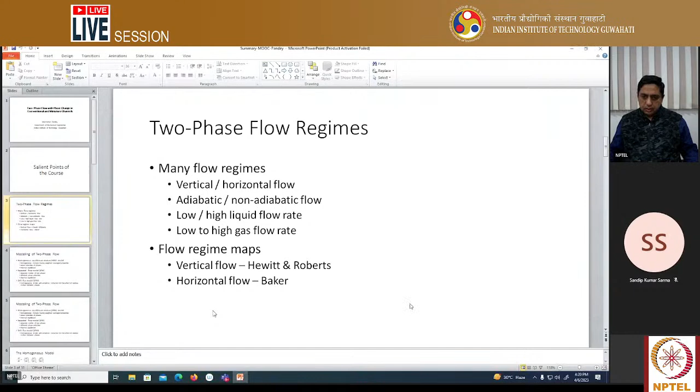Okay, I'll unshare and share again. After making full screen, I'll share it again. Oh, I have unshared, but still it is showing in YouTube. Now I cannot open this. Or should I share the whole screen? I'll share the screen itself. Okay. Still in YouTube, it is not showing. Okay, and now it is showing full screen. Okay, thank you.

Okay, so in two-phase flow, there are many flow regimes, unlike single-phase flow, in which there are only two major regimes, laminar flow and turbulent flow, and in between transition. So two-phase flow is much more complicated compared to single-phase flow. And these flow regimes depend on many factors. Whereas in single-phase flow, there is only one non-dimensional parameter, Reynolds number, which characterizes the flow regime.

In two-phase flow, there are many factors. It depends on the orientation, whether the flow is vertical or horizontal flow. There are different flow regimes, where some of them occur in vertical flow only, some in horizontal flow only, some in both.

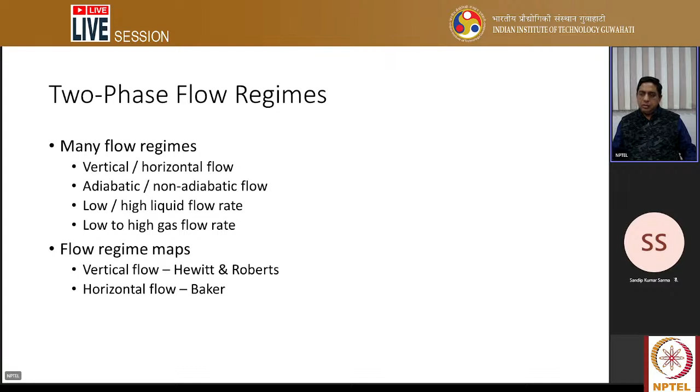There are many flow regime maps for vertical flow and horizontal flow and different types of flow arrangements and geometries. In this course, we have discussed only two flow regime maps, one for vertical flow by Hewitt and Roberts, and another for horizontal flow by Baker. In both of these flow regime maps, we calculate two parameters, and then based on their values, we locate the point on the map. And then based on the location of the point, we predict which flow regime is most likely to occur.

Then in the course, we have discussed modeling of two-phase flow. The modeling of two-phase flow can be done based on the flow regime, and there are some models which are not based on the flow regime. If we know the flow regime, then we can use a flow regime-based model. And if we don't know the flow regime, then we have to use the model which is not dependent on any particular flow regime. So in this course, we have discussed only those models which are not dependent on the flow regime. And we have discussed three models: homogeneous equilibrium mixture model or HEM model, separated flow model, and drift flux model.

In the homogeneous equilibrium mixture model, it is assumed that the two-phase mixture is a hypothetical fluid, and it has some hypothetical properties which are obtained by weighted averaging of the properties of the two phases, gas and liquid phases. It is assumed that both phases move with the same velocity. Actually, there may be a difference in the velocities. And thermal equilibrium is also assumed. That means both phases are at the same temperature. So if it is a liquid and vapor mixture of the same substance, then they have to be at the saturation temperature at the local pressure. So temperature is a function of pressure.

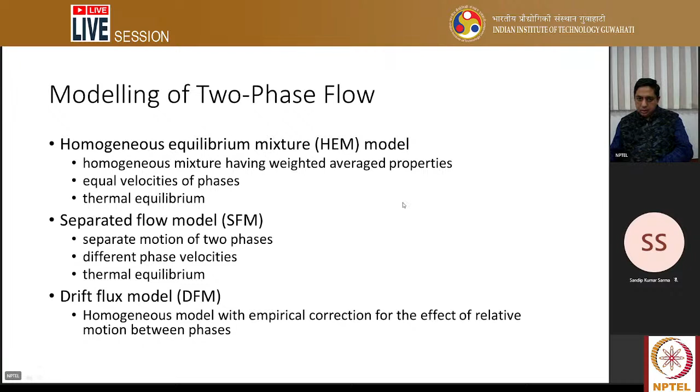Okay. In the homogeneous model, we write the balance equations for the mixture. And the momentum balance is transformed in such a way that every term is a pressure gradient, that is rate of change of pressure with the axial coordinate Z. This is a one-dimensional steady-state model that we are discussing. In this course, we have restricted to one-dimensional steady-state model only with constant cross-sectional area. So the momentum balance, after doing the necessary mathematical operations, we get it in this form.

The negative of the pressure gradient, because usually the pressure decreases as we go downstream along the channel. So that is why we write in terms of the negative of the pressure gradient. So the total negative pressure gradient is equal to the pressure gradient due to friction, pressure gradient due to acceleration, and pressure gradient due to gravity. The sum of these.

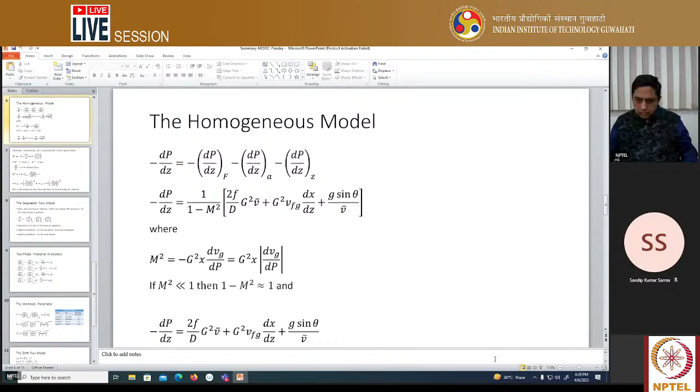I think I should use the laser pointer. Laser pointer? It is not there. Okay, anyway, I'm using the cursor. Where is the pointer? Mark? No, I don't want to mark, I just want to show. It is not there. Okay, I'll continue with this. And how to switch on the camera? Escape. Okay.

Okay, so the momentum balance is as follows. The total pressure gradient is the sum of the frictional pressure gradient, acceleration pressure gradient, and gravitational pressure gradient. And then the acceleration pressure gradient is written in terms of the mass flux and the specific volume. And then after some algebra, we get this expression: pressure gradient is equal to 1 upon 1 minus M square, and in the bracket we have 2f by D G square v bar plus G square vfg dx by dz plus g sin theta upon v bar.

So in the bracket, the first term comes from the frictional effect, the second term comes from the acceleration effect, and the third term comes from the gravitational effect. And here M square represents the compressibility of the vapor phase or the gas phase, and it is given by minus G square x dvg by dp. dvg by dp is negative, so we can write it as G square x absolute value of dvg by dp.

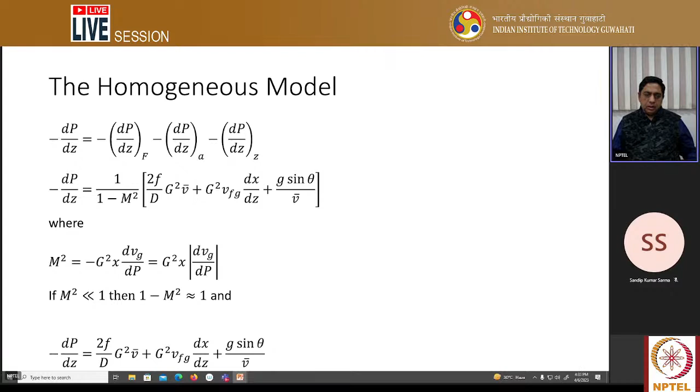Okay, this m square parameter represents the compressibility of the vapor phase, and if m square is very small, we can neglect it. And the other extreme is that when m square approaches 1, then 1 minus m square approaches 0, and then the pressure gradient approaches infinity. So that is called choked flow, and that is the limit of the flow through that channel. More than that just cannot flow through that channel. In fact, flow equal to that also is not possible through that channel. So to get that maximum limit, we set m square equal to 1, and then from that we get the expression for maximum mass flux, and expression for the maximum mass flow rate.

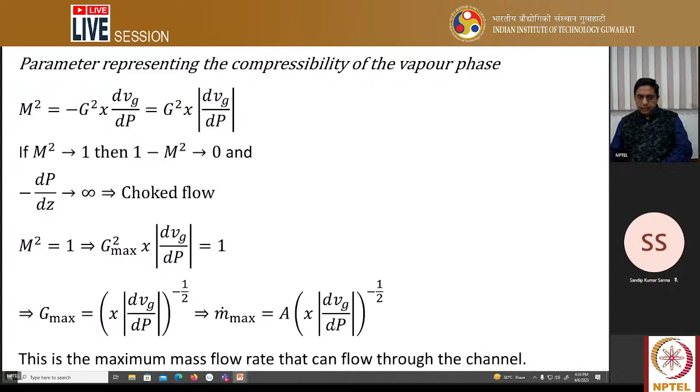Now the separated flow model, the mass and momentum balances for the two phases are written separately, and then from that we get the expression for the total pressure gradient. So again, it has the same format. The total pressure gradient is the sum of the frictional, acceleration, and gravitational pressure gradient. But these expressions are complicated and longer compared to the homogeneous model. So we get expressions for each of the pressure gradients. And since these expressions are complicated, to evaluate them, we use graphs or correlations.

And there is a quantity called two-phase frictional multiplier. In fact, 4 such multipliers are defined, which we will see in the next slide. And there are graphs and correlations for the void fraction. So there are different correlations given by different researchers, empirical correlations. Some researchers have given in the form of graphs, and some have given in the form of correlations, that is algebraic expressions.

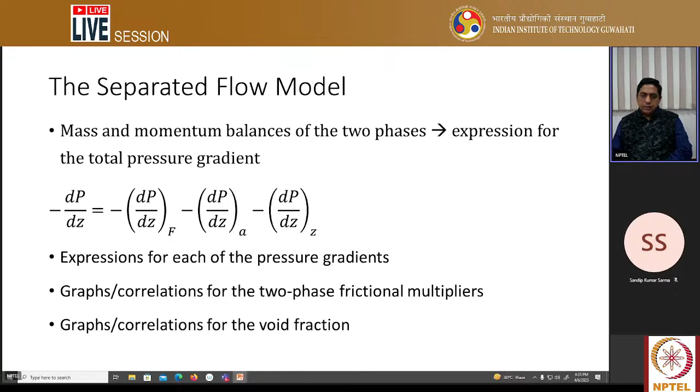4 frictional multipliers are defined. So this dp by dz subscript capital F is the frictional pressure gradient. And on the right hand side, we have subscript capital F, comma fo. This is the hypothetical pressure gradient that would have occurred if the entire fluid were in liquid phase. And then here in the second line, we have capital F, comma small f suffix. So this pressure gradient is the hypothetical pressure gradient that would have occurred if only liquid were flowing through the channel.

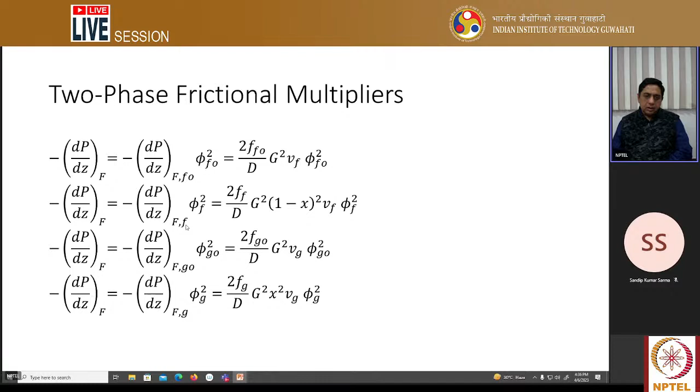Okay. So the corresponding two-phase multipliers are denoted by phi fo square and phi f square. And then in terms of the mass flux and quality and the friction factor, we have this expression 2 f_fo by d g square vf into phi fo square. And here we have 2 f_f by d g square (1 minus x) whole square vf into phi f square. Now similarly for the gas, two hypothetical pressure gradients are defined, subscript F, go and subscript F, g. This is similar to those for the liquid. Two frictional multipliers are defined, phi go square and phi g square. And in terms of the mass flux, quality and friction factor, we have these two expressions.

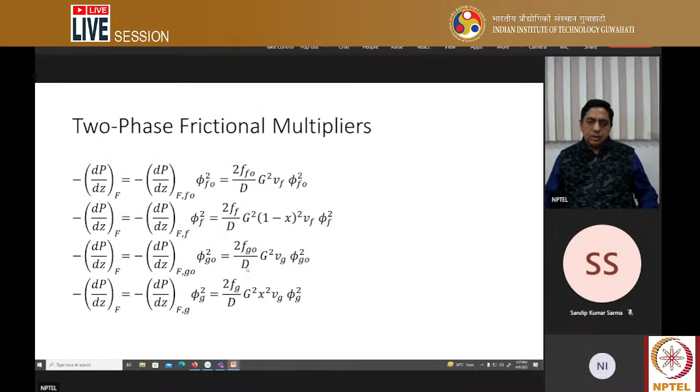There is another important parameter which is defined as the ratio of the hypothetical frictional pressure gradient, assuming that only liquid were flowing through the channel, upon, in the denominator, the hypothetical pressure gradient assuming that only gas is flowing through the channel. So in terms of frictional multipliers, it can be shown that this is equal to phi f square upon phi g square.

And four flow regimes are defined based on whether the two phases are laminar or turbulent. So there is the turbulent regime in which both phases are turbulent, and the corresponding Martinelli parameter is denoted by X subscript TT. Then there is the viscous turbulent regime in which liquid is viscous or laminar and gas is turbulent, and it is denoted by XVT. Then the turbulent viscous regime in which liquid is turbulent and gas is laminar, denoted by XTV. And then there is the viscous regime in which both phases are laminar, denoted by XVV.

So we can derive the expressions for these two regimes. We can easily derive the expressions because for these two regimes X, the Martinelli parameter, turns out to be independent of the mass flux and the channel diameter. So we have an expression for XTT. This is based on the Blasius correlation for the friction factor for turbulent flow through smooth pipes. It is (vf/vg)^0.5, (μf/μg)^0.125, and ((1 - x)/x)^0.875.

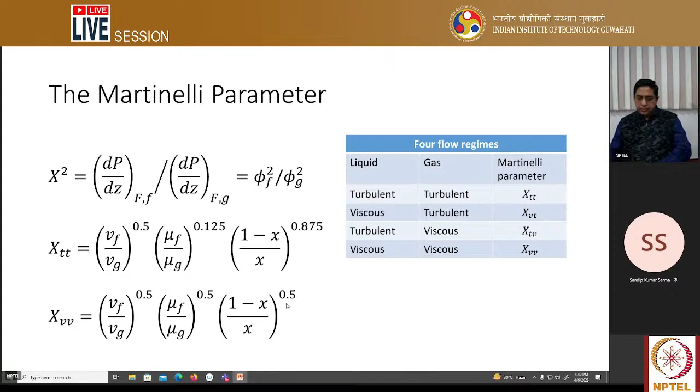Now the drift flux model. The drift flux is the volumetric flux of the gas phase with respect to the hypothetical plane which is moving with the velocity j. j is the total superficial velocity or the total volumetric flux, and it is equal to the weighted average velocity of the two-phase mixture. So jGF, the gas drift flux, is equal to alpha into (uG - j). This is the relative velocity of the gas with respect to the plane moving with velocity j, and jFG is the liquid drift flux. It is defined in a similar way, and it is equal to (1 - alpha) into (uF - j). And jGF is equal to minus jFG.

Now, jG is expressed in terms of alpha, j, and VGJ, and then we take the area average and define two coefficients, C0 and VGJ. So jG is written in terms of these quantities: jG is equal to C0 average alpha into average j plus VGJ into average alpha. Here C0 is called the two-phase distribution coefficient or concentration coefficient, and it represents the overall slip over the cross section, because the void fraction profile is usually not similar to the velocity profile.

So then we can close the meeting. I'll stop sharing the slide. Okay. And now should I close the meeting? Leave the meeting.